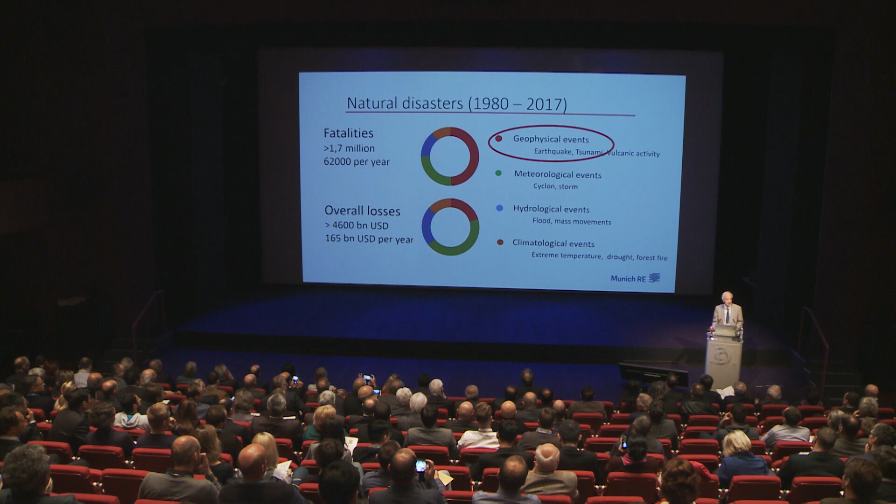Of course, we cannot prevent natural hazard, but what we can do is mitigate the consequences. And the keyword is resilience. Also, this conference includes the word resilience. This is nowadays a magic word, I would say. You cannot get a research project without putting resilience in the keywords.

Unfortunately, in Slovenia, we have not a proper word in Slovenian language for resilience, which would be equivalent to the meaning according to the Oxford Dictionary: this is the capacity to recover quickly from difficulties. In the context of disaster management cycle, resilience is the capacity to prevent, to prepare for, to respond to, and to recover from the impacts of disasters.

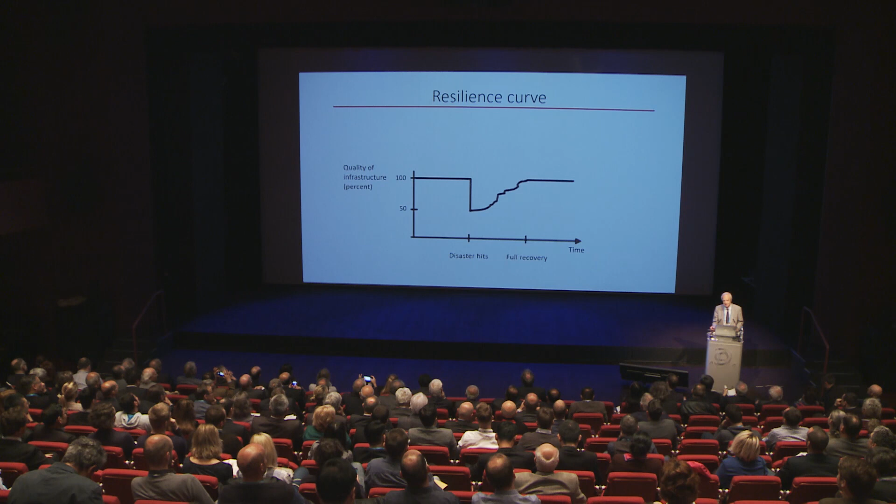I would say that the main step here, by far, is prevention. This can be explained by looking at the so-called resilience curve, which shows the quality of infrastructure versus time. At the moment when, let's say, an earthquake hits, there is a sudden drop in the quality of infrastructure.

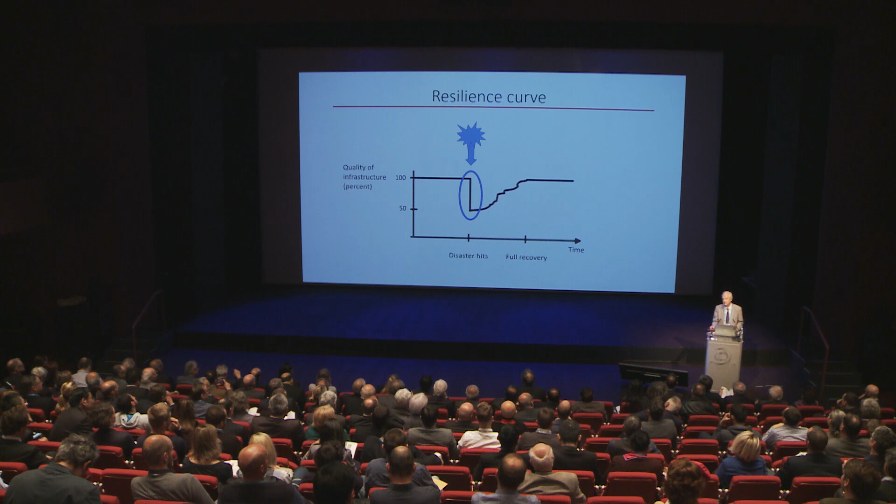If the structures are seismic resistant, this drop is small and recovery is quick. If the structures are not resistant, the drop is very large and the recovery is very costly and takes a very long time. So an extreme example is Haiti.

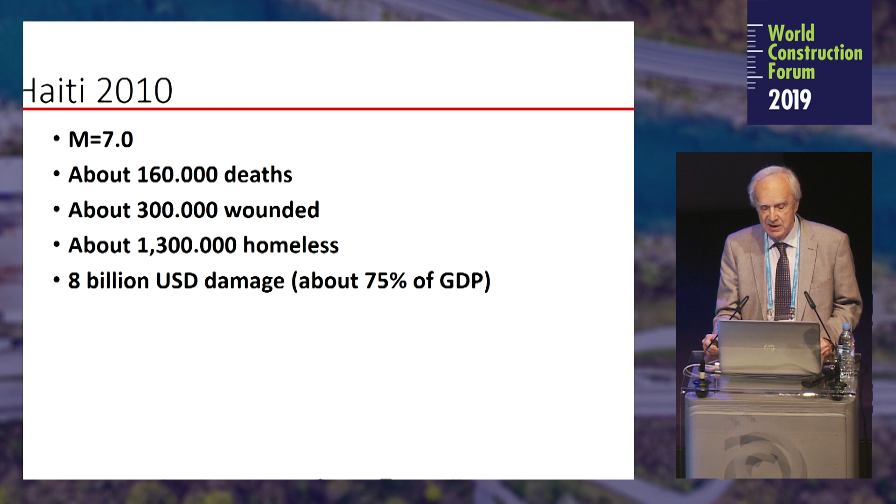As you know, there was an earthquake in Haiti in 2010 with catastrophic consequences. The magnitude was not so large, only 7, but the consequences - death, wounded, homeless - were catastrophic. This was the most destructive earthquake that any country has experienced in terms of the number of fatalities relative to its population. The reason for this was inadequate construction practice due to poverty, lack of professionals in the construction industry, and no seismic code.

Another example, on the other end, is a developed country, Chile. In the same year, the magnitude was much stronger. Magnitude is a logarithmic scale, as you know, and this earthquake was almost 1,000 times as strong in terms of energy. In spite of this energy, the number of deaths was relatively low compared to the magnitude, but the damage was still extensive.

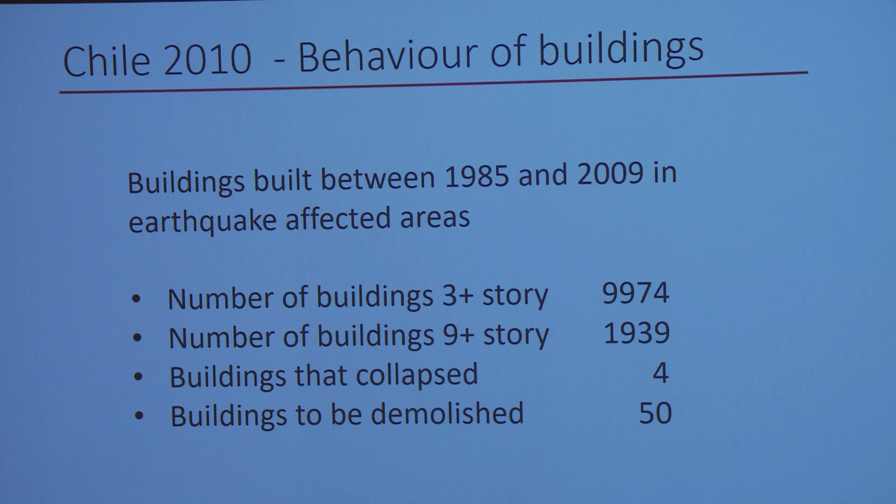Here we experienced very good behavior of engineered structures. Some data from taller buildings built in the last 20 years before the earthquake: only 4 buildings collapsed and 50 were to be demolished. This experience can be followed and seen also after other earthquakes.

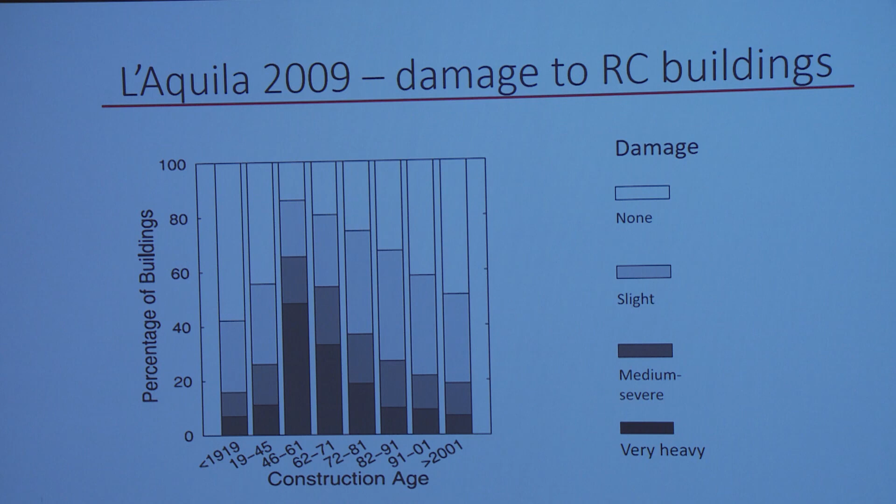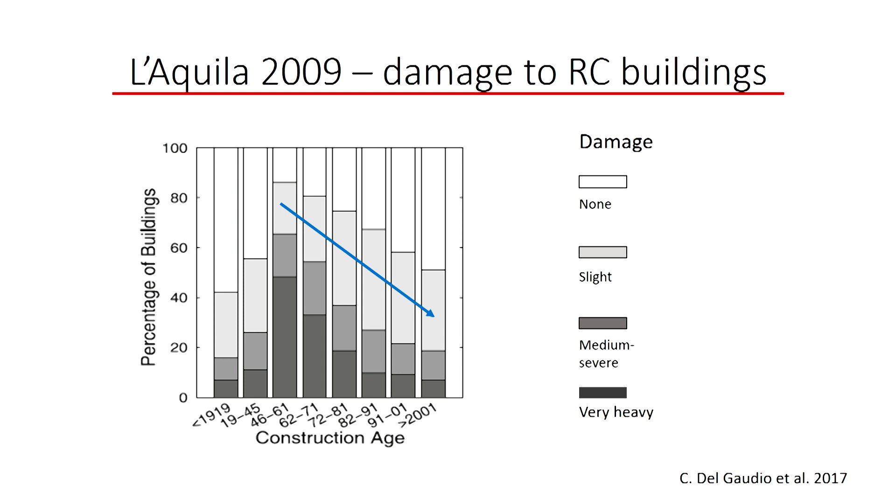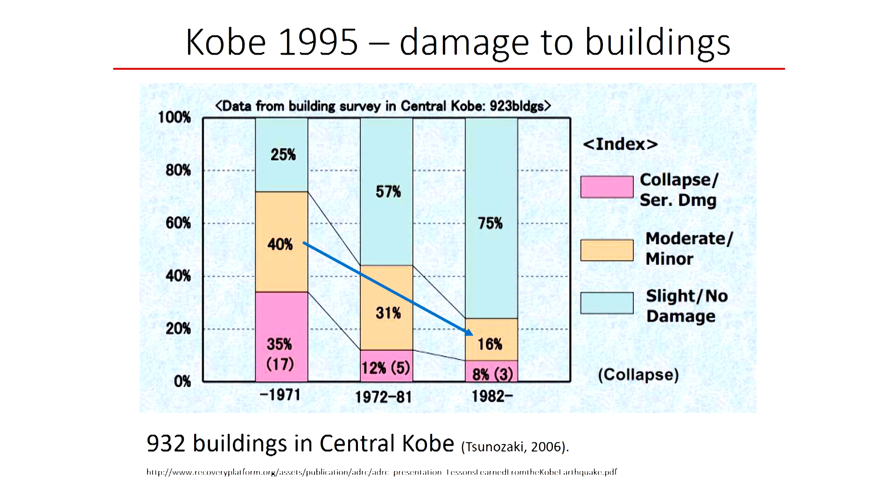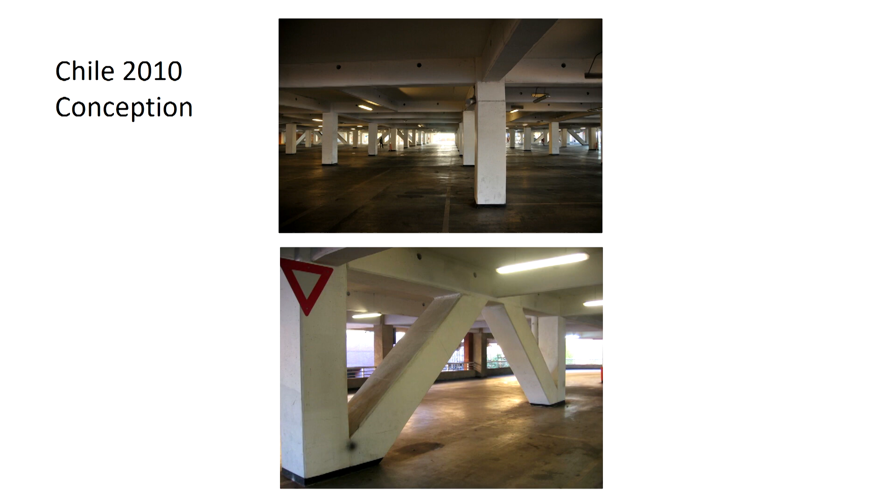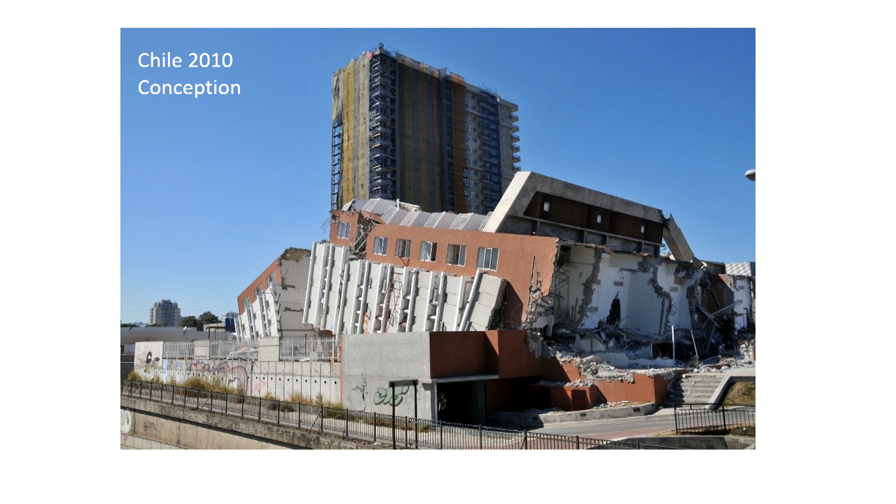This building, Alto Rio, was built just 2 years before the earthquake. It was an apartment building - this is before the earthquake, and this is after the earthquake. Still, it's difficult to believe, but 79 people survived this collapse.

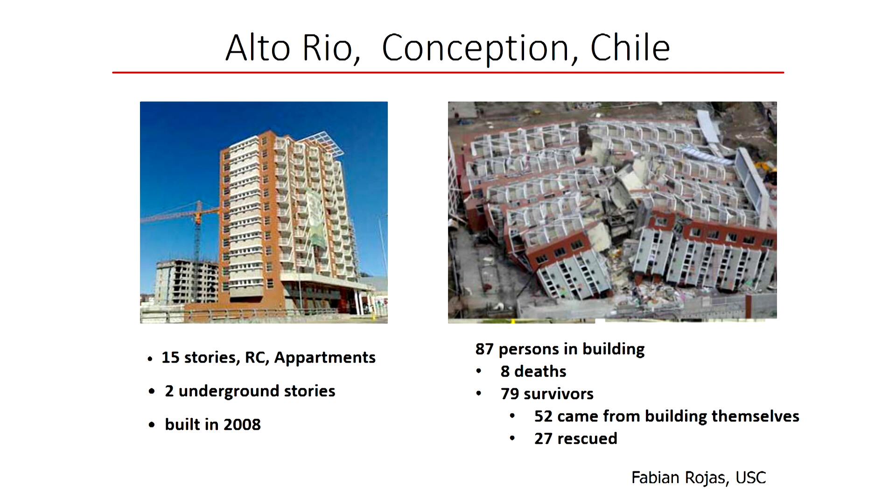So what we can say for new buildings is that modern codes provide seismic resistance if they are implemented in design and construction. So what is the potential problem? Review of design and control of construction. Earthquake-resistant design is not completely trivial, and some skills are necessary. Without review, things like what we showed before can happen.

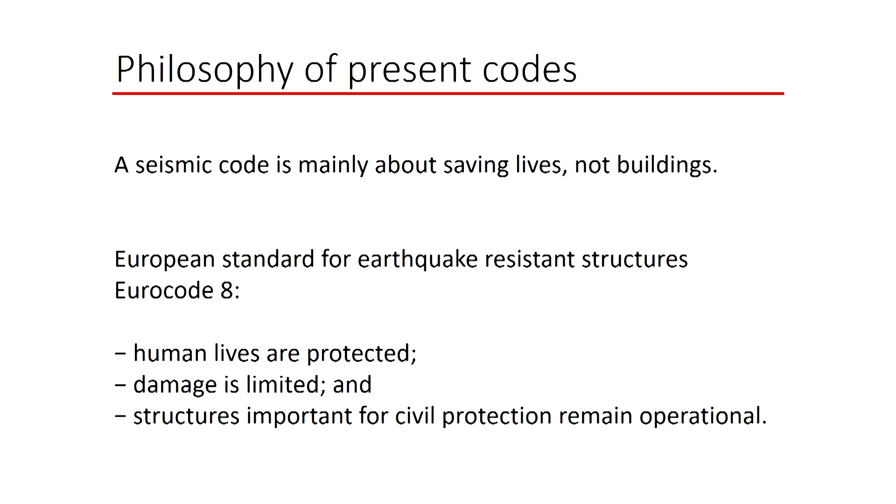I would like to emphasize something not very well known to the general public: the seismic code is mainly about saving lives, not buildings. For example, the aims of the European standard for earthquake-resistant structures, Eurocode 8, are three: human lives are protected, damage is limited, and structures important for civil protection remain operational. Please note, damage is limited, not damage is prevented. This is because of economic reasons.

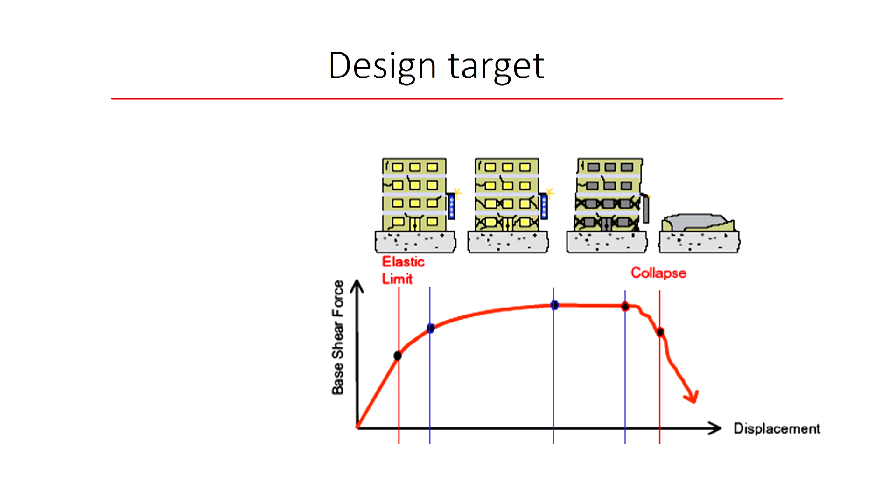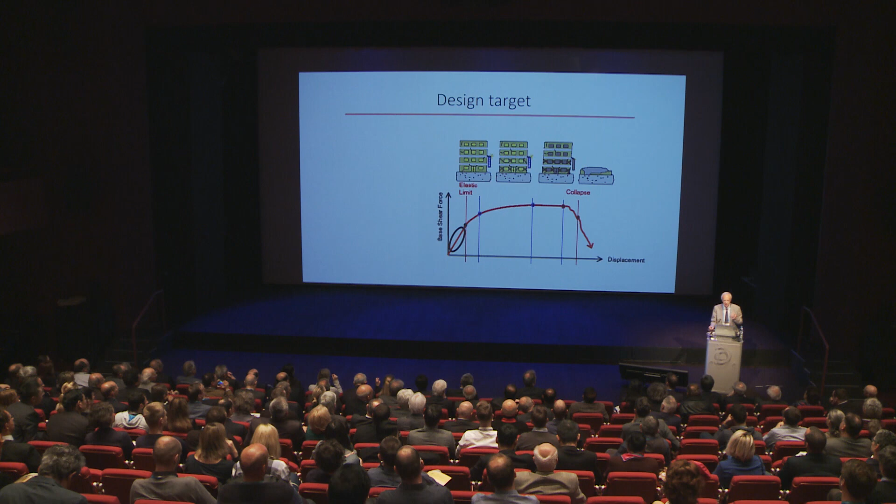I will try to explain this by showing the load deformation diagram. In a usual situation, with vertical loads, small wind load, and so on, we are in this elastic region. That means no damage.

But in the case of earthquake, we design for rare earthquakes, about 500 years return period. The probability of this event is 10% in 50 years, so relatively low probability. So we design for life safety, not for preventing damage, for economic reasons, because earthquake-resistant design costs something.

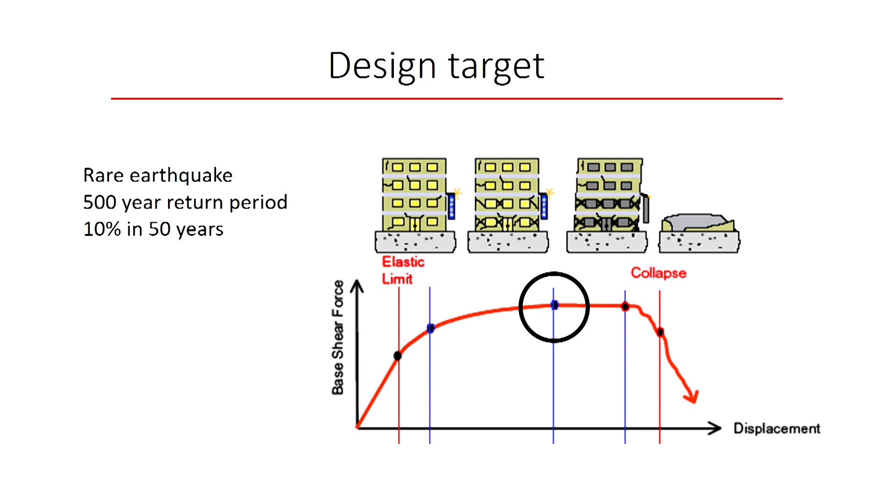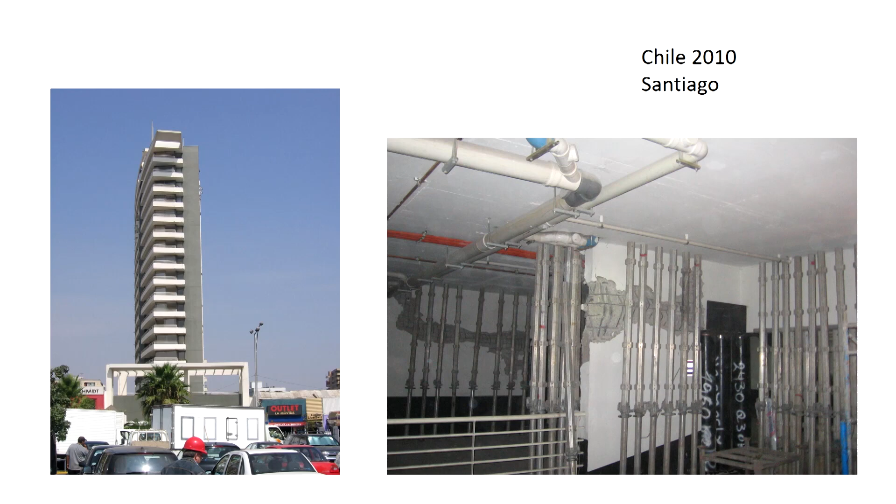To demonstrate this, I will show a building from Chile, from the same earthquake in Santiago. From outside, it looks nice, but if we went to the basement, it was quite heavily damaged. The building was evacuated, and of course the owners and tenants were not very happy.

Because of this, the tendency in most developed countries, like New Zealand, which had a very bad experience with the Christchurch earthquakes some years ago, is to decrease the damage, to change the design from life safety to less damage. But of course this costs money and will take time, and not many countries can afford this.

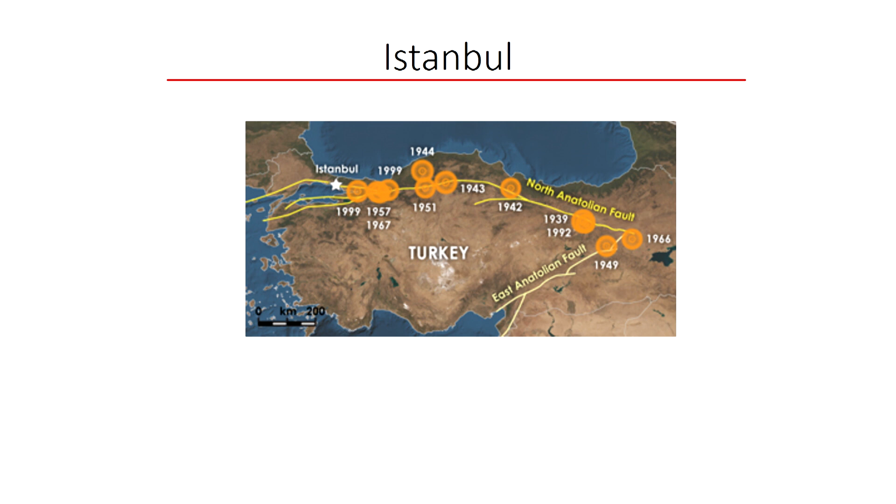Now I will move to existing buildings, old buildings built without seismic codes or with outdated codes. We have already seen what happened in Haiti, and here is a picture from Turkey, the Izmit earthquake in 1999, with very severe consequences. This earthquake happened at the North Anatolian Fault. Many severe earthquakes happened at this fault in the last century, and the location of this earthquake was here. Istanbul is here, with 15 million inhabitants and about 1.5 million buildings, a huge number built without seismic resistance.

This is one of the cities with the highest seismic risk in the world. What can be done? Unfortunately, not much.

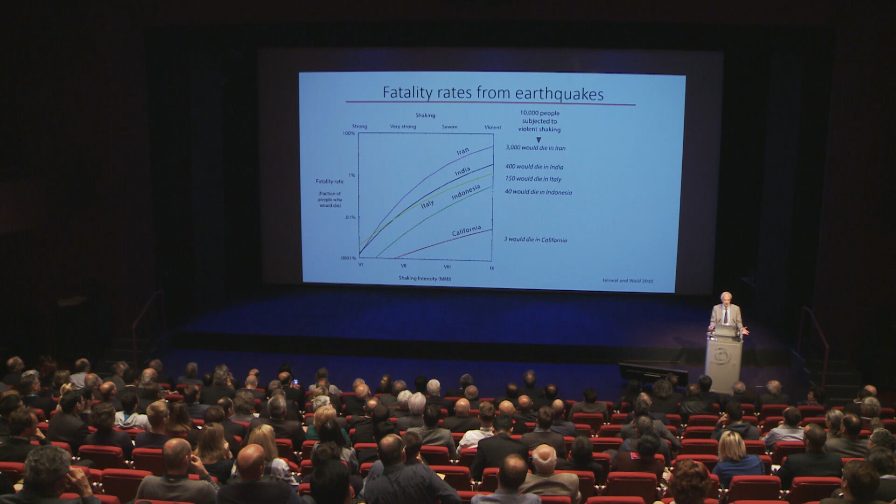Here I will show fatality rates from earthquakes. This was a study to show how many fatalities we expect from different earthquakes, depending on shaking intensity. This diagram shows that if there are 10,000 people subjected to violent shaking, the strongest earthquakes, it's expected that 3,000 would die in Iran and only 3 in California. The difference is mostly from building quality and construction types. In California, many wooden houses.

In Iran, mostly unreinforced masonry and stone houses. It's interesting that Italy is quite high in this plot, but the reason is that there are many unreinforced masonry houses there.

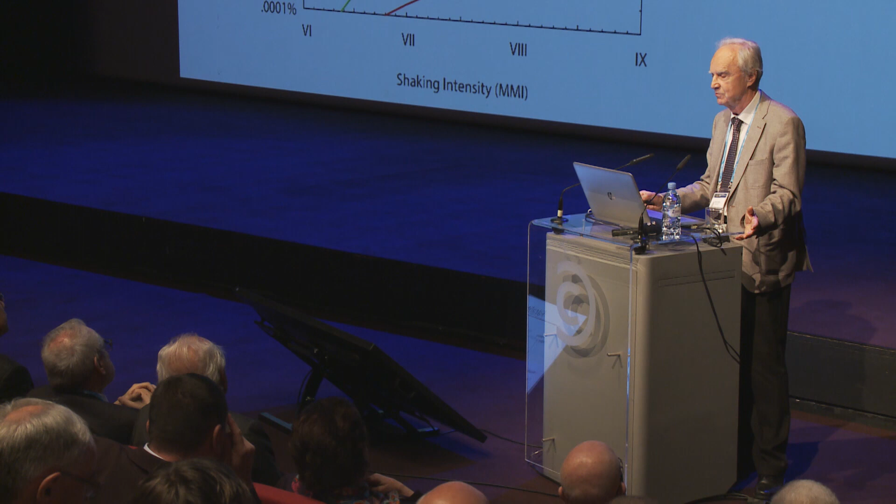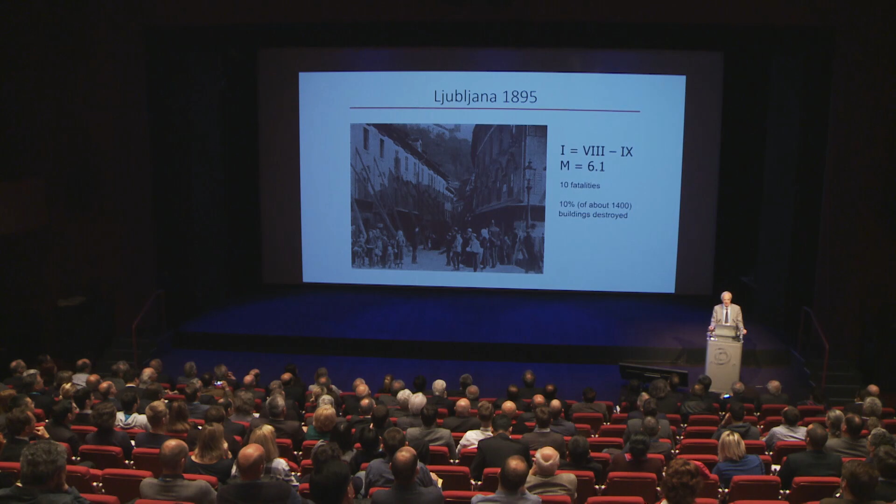A few words about Ljubljana, the city where we are today, my hometown. In Ljubljana, a moderate earthquake, magnitude 6, happened in 1895. Ljubljana is not a big city, and at that time was even much smaller. But 10% of buildings were destroyed and removed. At that time we lived in the Austro-Hungarian monarchy, and the next year a building order was issued requiring some measures for unreinforced masonry buildings.

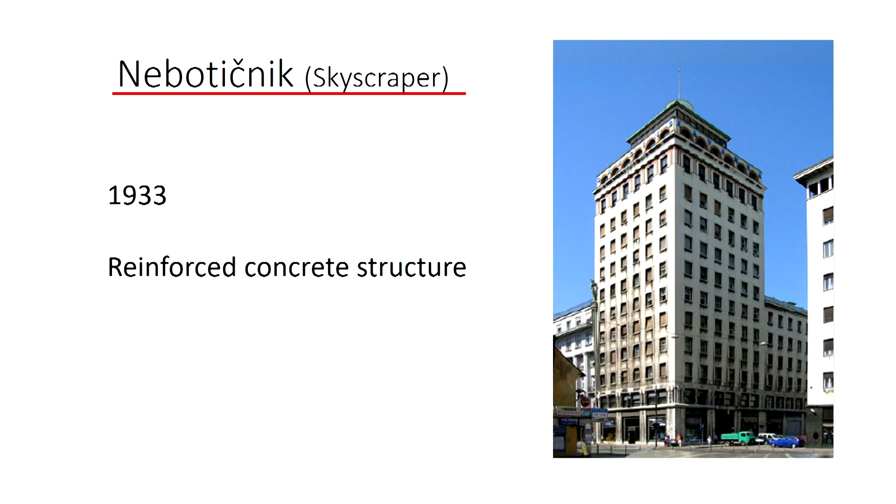People in Ljubljana still remember the earthquake, and 40 years later, when they built this building in the center of Ljubljana, we called it Nebotičnik, meaning skyscraper. At that time it was the tallest building in the whole region. It was a reinforced concrete structure, and they put a lot of emphasis on earthquake resistance, according to the knowledge available at the time.

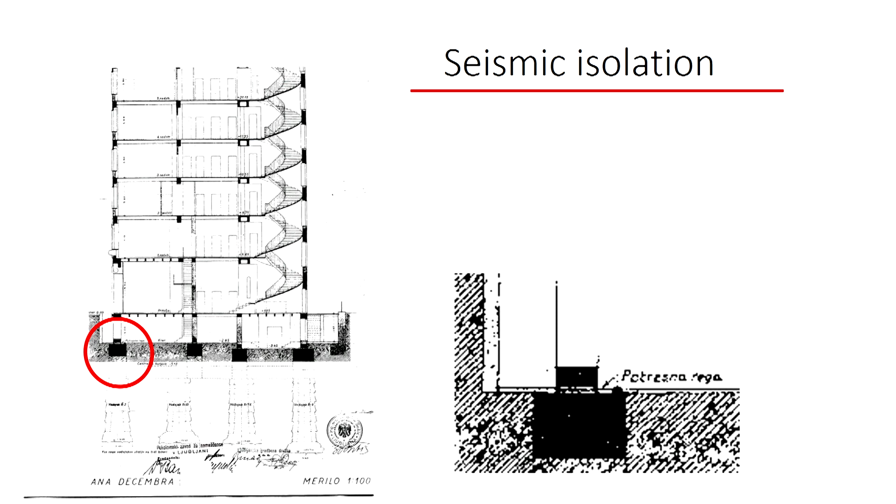It's interesting that the designers used seismic isolation. This is a cross-section of the building, and here this detail is written 'Potresna rega', which means seismic dilatation. As far as I know, this was one of the first engineering applications of seismic isolation. Actually, I haven't found an earlier one, maybe there were some.

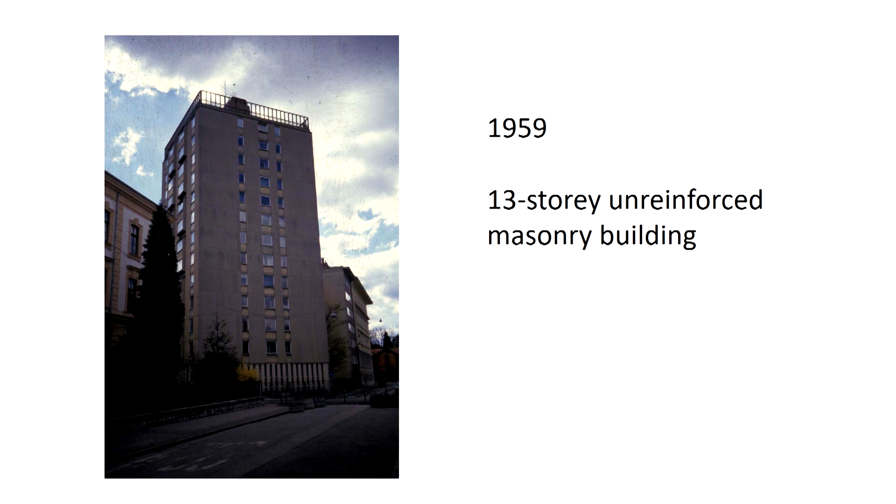But then, unfortunately, after the Second World War, there was a time of poor quality, quick construction, and no seismic codes. At that time we had no seismic codes, and some buildings like this were built in Ljubljana. This one was built in '59, a 13-story unreinforced masonry building.

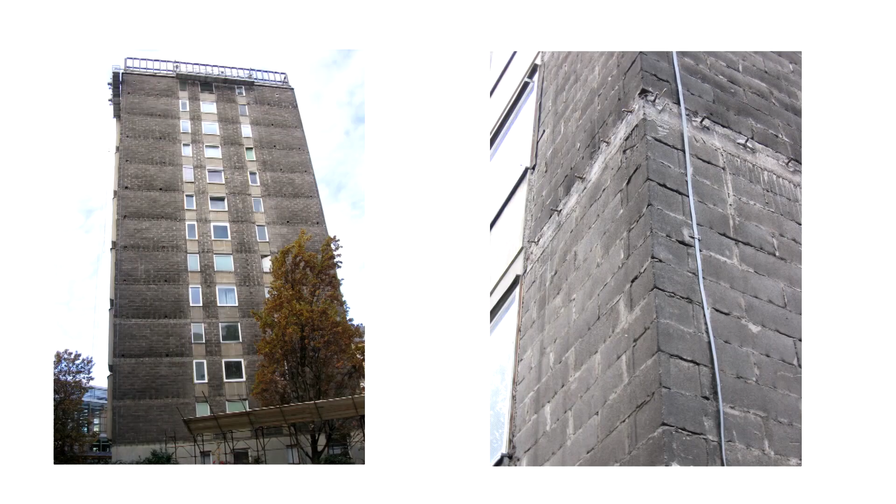You can see when the facade was removed. I took these pictures, and you can see this is unreinforced masonry. According to today's standard, it could be maybe 2 or 3 stories maximum, not 13 stories. There are several buildings like this in Ljubljana.

No seismic resistance. You can see that in one building they even added an extra story on top. So what to do with these buildings? These are apartments with private owners.

Retrofit is expensive, and it's not only a financial problem, it's a problem of logistics. People have to go out for the period of the reconstruction. So I'm afraid that this is a mission impossible.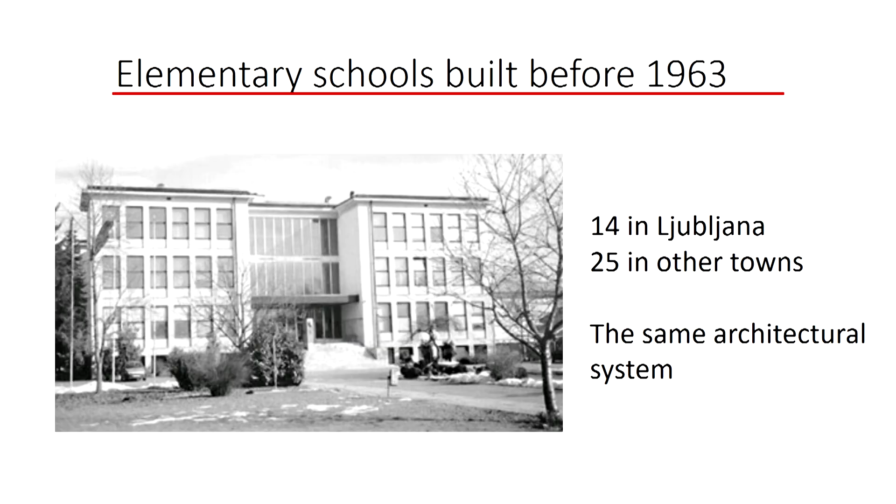So we have another problem in Ljubljana. These are elementary schools built before '63. '63 is an important year because in '63 we got the first seismic code. There are 14 schools like this in Ljubljana, 25 in other towns, all the same architectural system, of course not seismic resistant. And this is one of these schools, 100 meters from the place where we are and 100 meters from the governmental palace. When children are concerned, we are especially sensitive.

And what happened in Italy? In Italy, a school collapsed in 2002 in a small town. Half of the population, which was at that time in the school, died. So this was really a catastrophe.

And actually, this event accelerated seismic retrofit of schools all over the world.

For example, a very good example is Cyprus, Greek Cyprus. In the period of 10 years, they checked all of their buildings, 660 school buildings. Half of them they found to be okay, but the other half they either demolished and replaced by new ones or retrofitted.

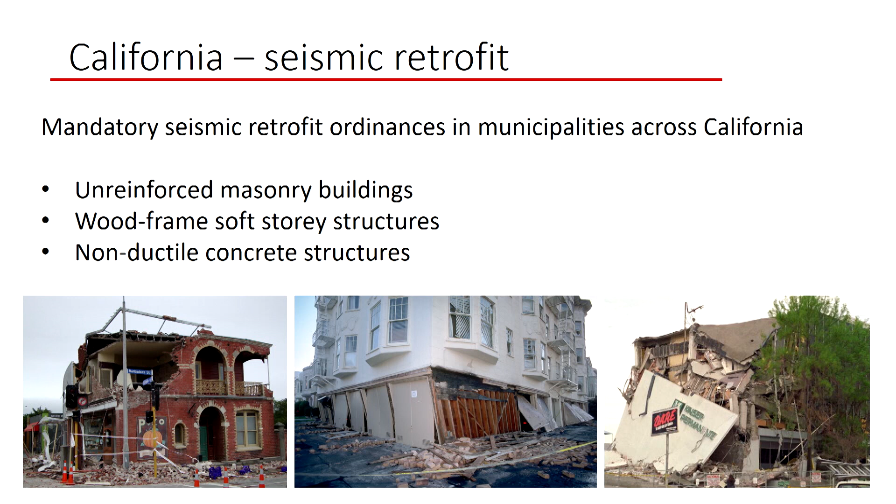There is a program going on in California in several municipalities. Mandatory seismic retrofit ordinances have been implemented, and it is required to retrofit the most vulnerable buildings. These are unreinforced masonry buildings, wood frame soft-story structures, and non-ductile concrete structures. So each property owner of vulnerable buildings received a so-called order to comply and is required to complete retrofit or demolish the building in 7 years. Of course, there are financial incentives, so favorable loans and subventions and things like that.

So what is the situation now? 3 months ago, these so-called orders to comply have been issued for all the soft-story buildings that need seismic upgrades. 1,500 already retrofitted and 6,400 in progress.

So a few words about soft-story. Soft-story, I always told my students, this is enemy number 1 of seismic behavior.

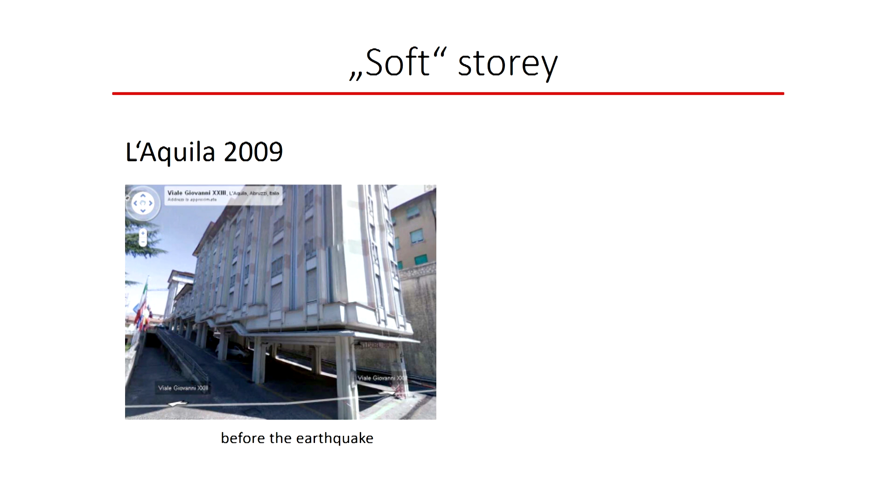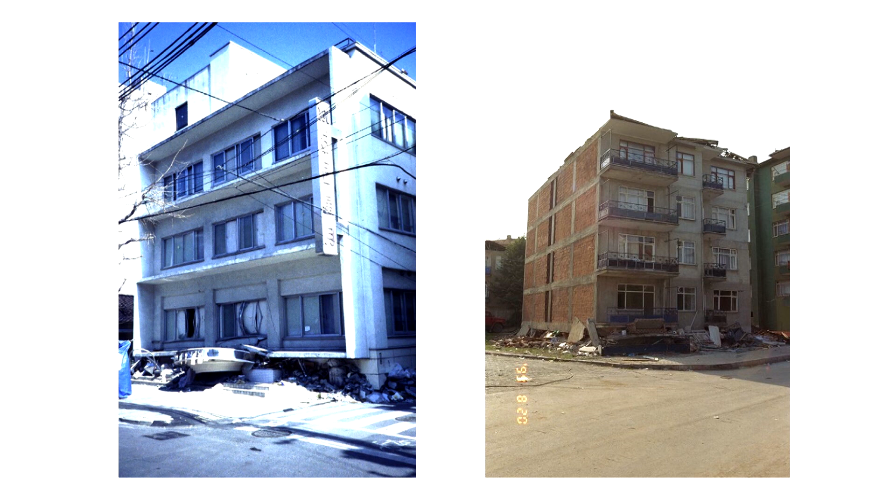So soft-story buildings are built because of architectural requirements. And I put here only 2 of them, one in Japan and the other one in Turkey. Here used to be the first story. There are thousands of buildings like that. So this is enemy number one.

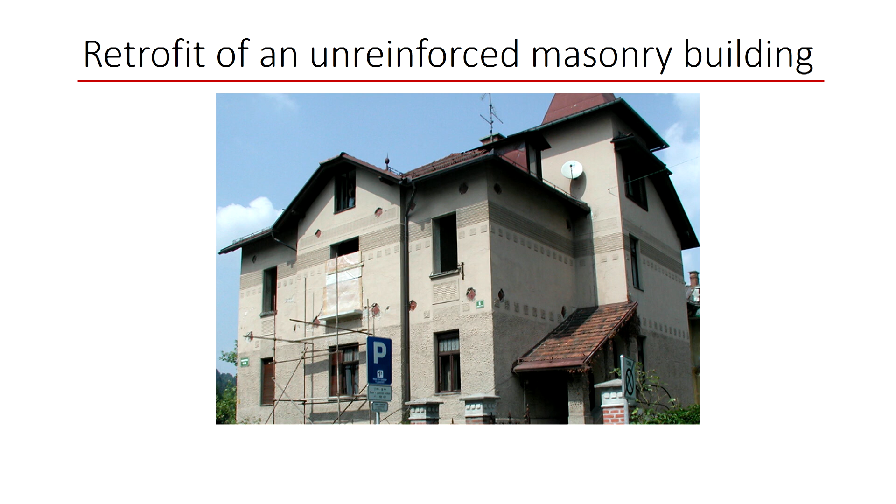I will finish my examples with a retrofit of an unreinforced masonry building. So this is a building in Ljubljana, more than 100 years old, with wooden floors. What we did is a retrofit. We put some ties from one facade to another facade in order to prevent walls from falling out of plane.

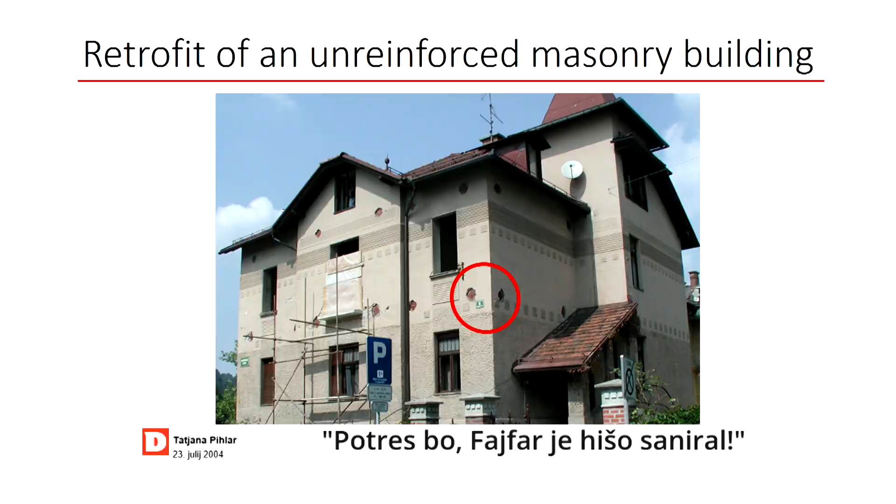So actually, this happened to be my building where I live. Very soon after this retrofit, a moderate earthquake happened in Slovenia, and journalists came, and we discussed different things, and I mentioned that I retrofitted this building. The next day there was an article in the daily newspaper: 'Potres bo, Fajfar je hišo saniral,' which means an earthquake will happen, Fajfar fixed the house.

So, you know this joke: there will be a very cold winter, Indians are preparing firewood like crazy.

So let me conclude. Earthquake resistance of structure is the key element of seismic resilience. As far as new structures are concerned, codes are okay, but they have to be observed. Of course, they do not prevent damage, but the tendency is to minimize damage. Problems are old structures built before codes or built without codes. Their retrofit is needed. Of course, not everything can be retrofitted, but it's reasonable to start with schools and hospitals.